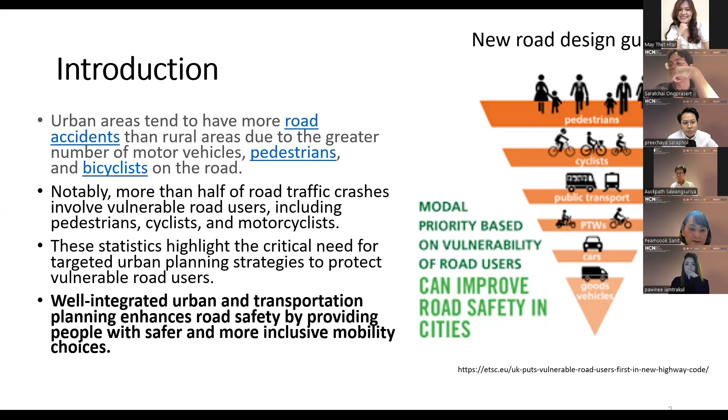Road safety remains a pressing global issue. Urban planning and design strategies for vulnerable road users are gaining popularity in cities around the world. For example, the case of Paris shows the public debate on road violence when roads are shared with pedestrians, cyclists, and motorists.

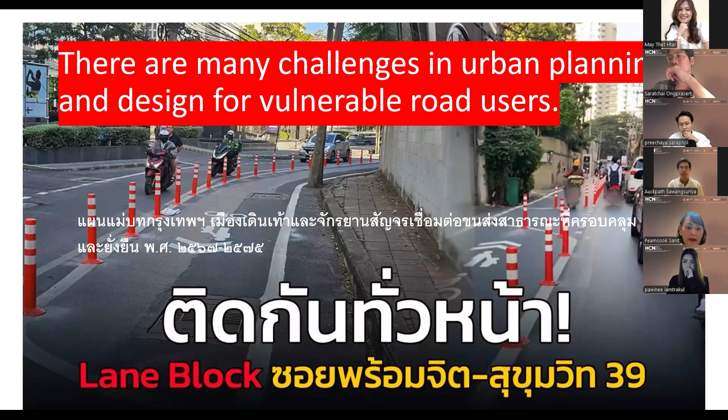In Thailand, there are many challenges in urban planning and design for vulnerable road users. As we heard from the news last month about the social experiment on Sukhumvit area on Soi Promjit road, there were a lot of comments from both negative and positive points of view. The challenges in road safety for vulnerable groups.

Starting with one major challenge: the design and allocation of road space. According to poor road infrastructure and superblocks in the case of Bangkok, road area ratio is only 8%, compared to 23% in Tokyo and 38% in New York.

The limited road surface area is often cited as the major cause of traffic jams and unsafe conditions for vulnerable users. This particularly limited road surface area poses significant challenges for urban mobility as well.

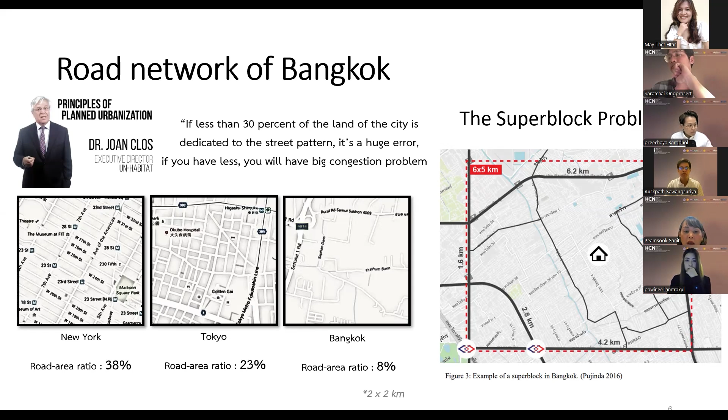As mentioned in the previous presentation from Dr. Kasem and Dr. Auckpath, we all agree that motorcycles dominate Bangkok streets, with nearly 4 million motorcycles registered in Bangkok, and more than 100,000 are motorcycle taxis. Tragically, motorcycle riders account for over 60% of fatalities.

From my research on the future of urban mobility, it reveals that Bangkok will be the motorcycle city forever, from now to the future.

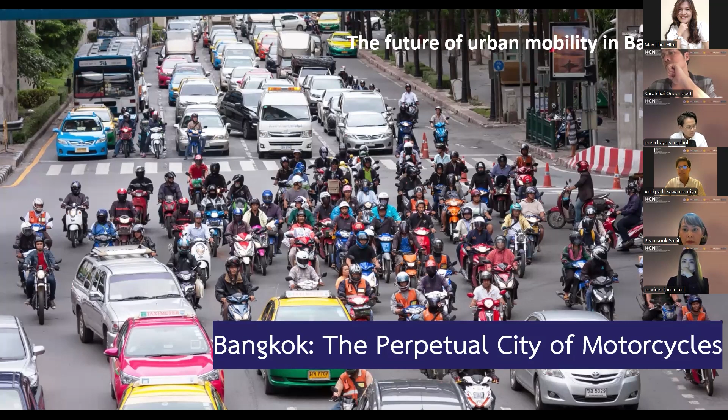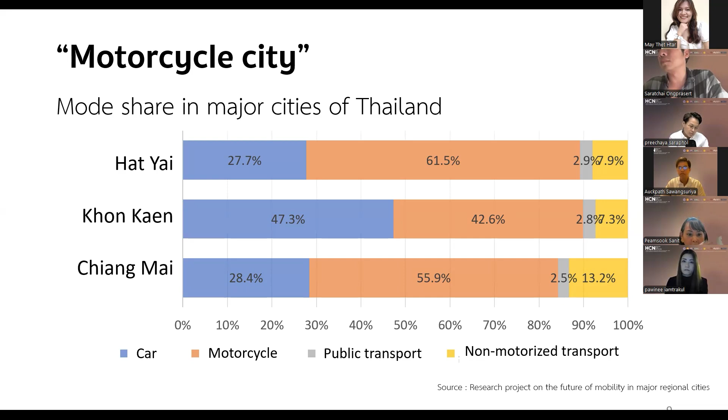When we look at other cities in Thailand, we see the same situation with major cities where motorcycles dominate the mode choice, including Hat Yai, Khon Kaen, and Chiang Mai. Thailand has the highest motorcycle usage in Southeast Asia, as well as the highest motorcycle accident deaths in the world.

Despite their prevalence, the infrastructure for motorcycles is nearly non-existent. There is still no motorcycle lane in Thailand now. Dr. Kasem proposed that we should have motorcycle lanes in Thailand in order to reduce accidents on the roads, particularly for motorcycle users.

The next part will explain how urban planning affects road safety. Urban sprawl has further complicated mobility. There is no job and housing balance in Bangkok and major cities as well, so housing development occurs in city peripheries, but concentration of jobs is still in the CBD.

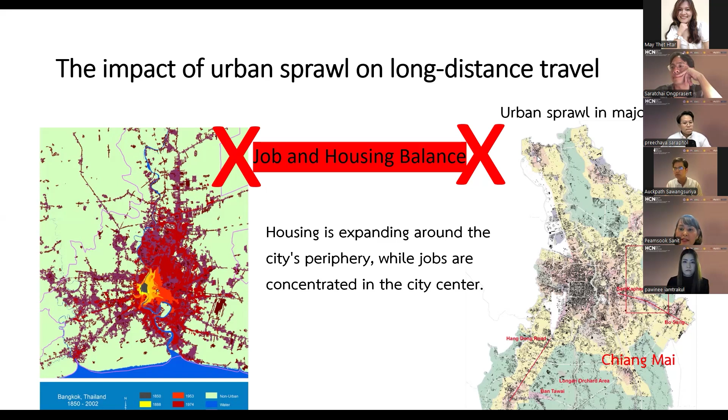This phenomenon forces long distance commutes, often on poorly designed roads. This causes high risk of road accidents among vulnerable groups, particularly for motorcyclists. The situation is the same with major cities in Thailand.

The lack of integration between urban planning and transportation has intensified the risk. Most of the bypass roads have no control over settlement along the bypass roads. Hence, there are frequent motorcycle accidents at U-turns.

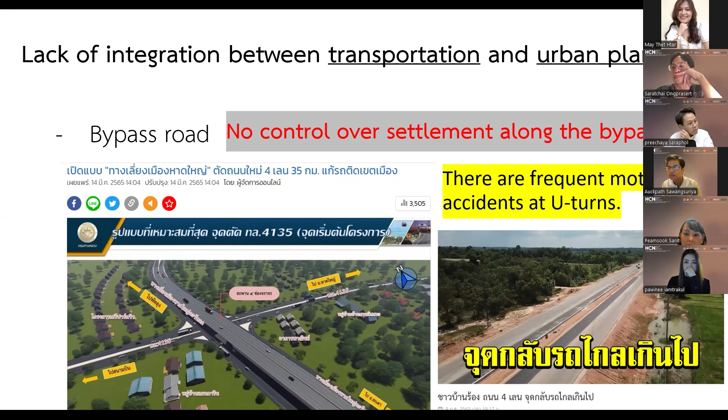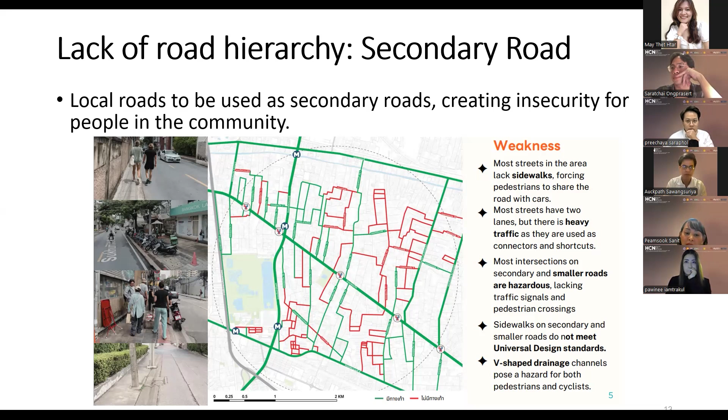And the last one, the lack of road hierarchy and fewer secondary roads causes traffic jams and intensifies the risk of road accidents. In the picture, you can see this is the case of Sukhumvit Phrompong area, showing the superblock comprising Sukhumvit, Asok, Phetchaburi, and Thonglor Road. The soi or local roads inside the superblocks are used as secondary roads connecting the main roads, Phetchaburi and Sukhumvit, creating insecurity for people in the community within the block.

So BMA has a project to design bicycle lanes as well as pedestrian lanes for the people within the block. This area highlights both strength and weakness of the current urban planning. While pedestrian and bicycle lanes exist, they lack barriers, allowing motorcycles to share the lane with all users. This leaves pedestrians and cyclists feeling unsafe.

So the next session explains the importance of urban planning in mitigating the risk. As Dr. Kasem mentioned in the previous presentation, urban mobility is at the heart of city life.

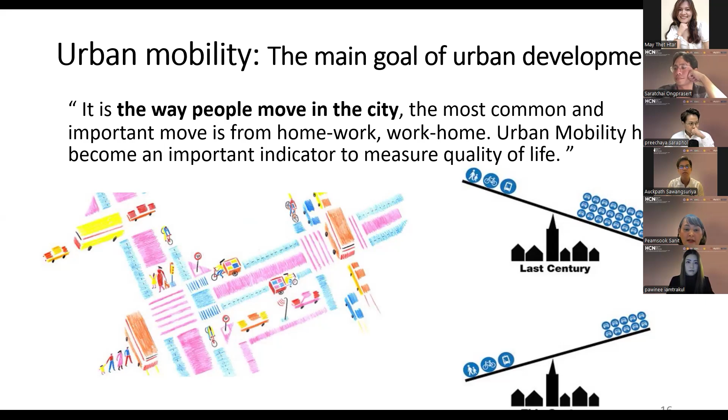It encompasses daily activity, especially commuting between home and work, concerning the way people move in the city. So safety and sustainable urban mobility directly correlates with quality of life. Thus, planning for road safety must be a core aspect of urban development. As you can see in the picture, last century we focused on the flow of vehicles, but this time the paradigm has already shifted to the flow of people, prioritizing pedestrians, cyclists, and public transportation users first.

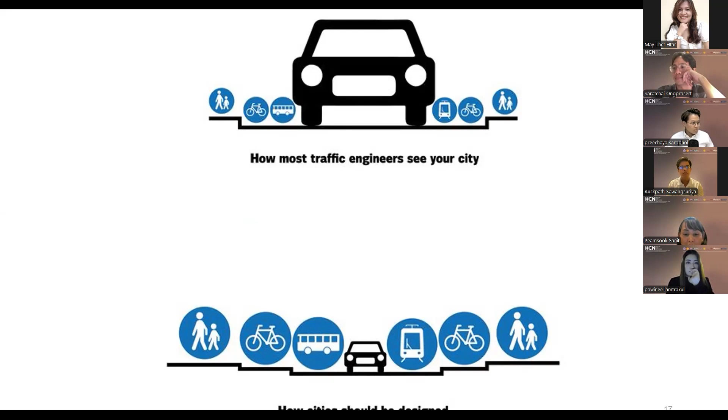So from this picture is the point of view, the difference between the engineer and the urban transportation planner. This picture explains that the road is no longer designed only for cars, but for all road users inclusively. So the urban planner strategies are expected to transform car cities into people cities.

So the last one, in conclusion, I will explain the urban planning strategies to enhance road safety for vulnerable users. To start with the idea, same as Dr. Kasem proposed, sustainable urban mobility planning should be promoted as a tool to enhance road safety. The paradigm should shift from traditional transportation planning that focuses on traffic to sustainable urban mobility planning that focuses on people, as well as shifting from traffic flow, capacity, and speed into accessibility and quality of life.

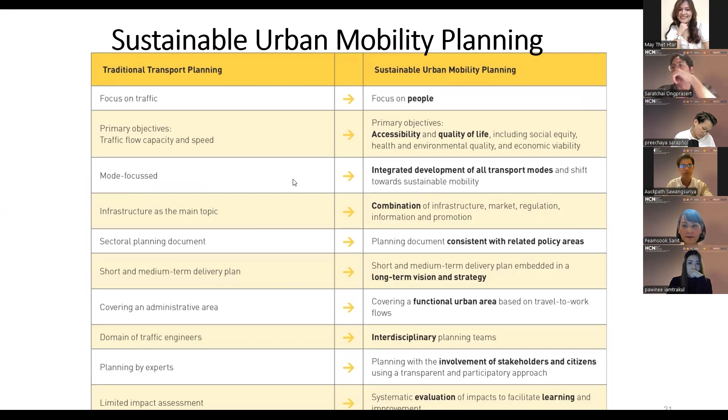So the last one, how to integrate road safety in urban planning. Three key strategies are proposed. The first one, infrastructure improvement: conduct thorough research before designing facilities for motorcyclists, pedestrians, and cyclists. We need more research on how to adapt countermeasures from developed countries to our country. This ensures infrastructure meets user needs and enhances safety.

The second one, job and housing balance promotion: encourage mixed-use development to minimize travel distance and reduce reliance on unsafe transportation modes, such as the motorcycle. And the last one, safe public transportation options: enhance access to safe and reliable public transportation for vulnerable groups, providing an alternative to riskier modes like the motorcycle.

The purpose of urban transportation planning is not only to solve congestion, but to provide people with more alternative choices. So in conclusion, road safety for vulnerable users is not just a traffic issue, it is a planning issue. By improving infrastructure, promoting mixed-use development, and enhancing public transportation, we can create safer and more inclusive cities.